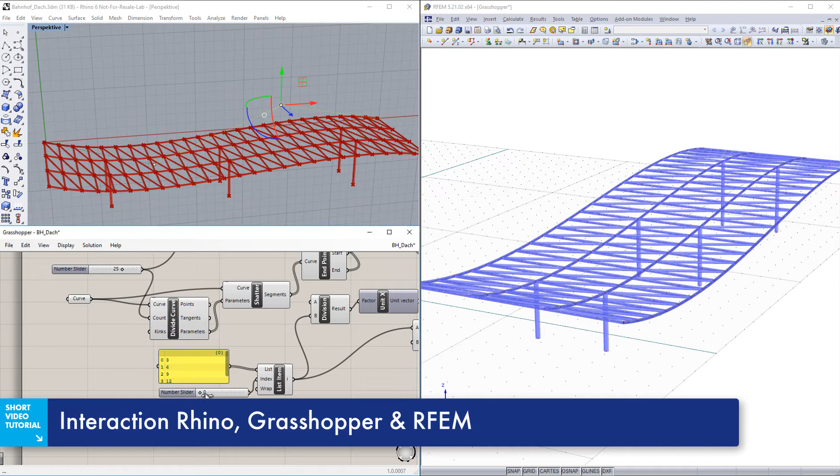Using the Rhino plugin Grasshopper, you can parameterize models as required. With the RFEM interface, you can export these models live to RFEM. Basic features will be explained in this video.

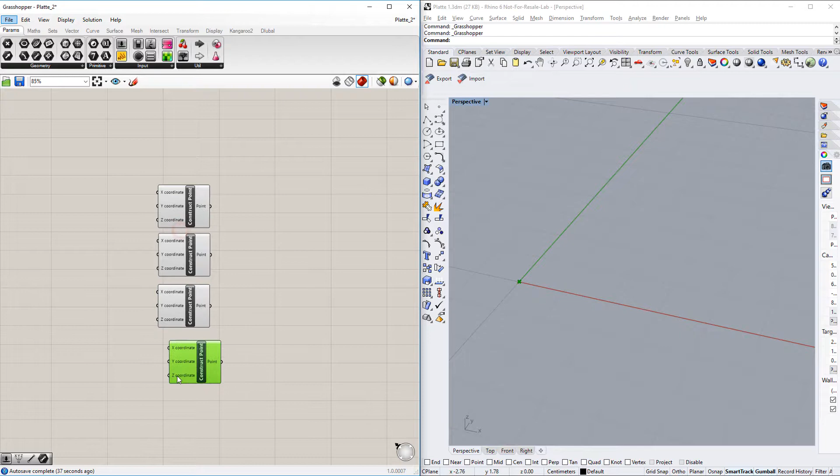First, create a point with the construct point command and copy it 3 times with Ctrl+C, Ctrl+V. Specify the point coordinates X and Y with sliders, so that they can be easily adjusted later with the slider. Connect the sliders to the point components, and assign the coordinates to the nodes.

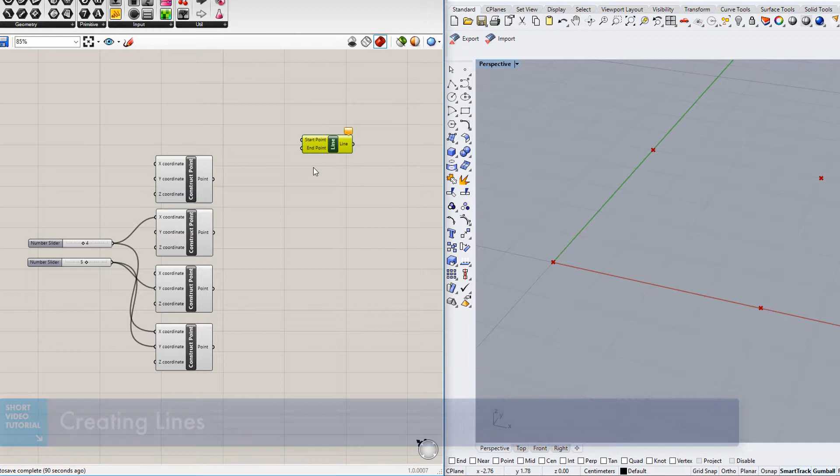In the window on the right, all elements are graphically displayed in Rhino. Now insert a line component, and create 3 more lines using copy and paste. Start and end nodes are then assigned to the lines. Simply also connect the individual components with each other.

To create members for RFEM, insert the Dlubal component member. You can find it in the Dlubal tab, which will be released with the interface in Grasshopper. Connect the line components to the member component and define the member geometry.

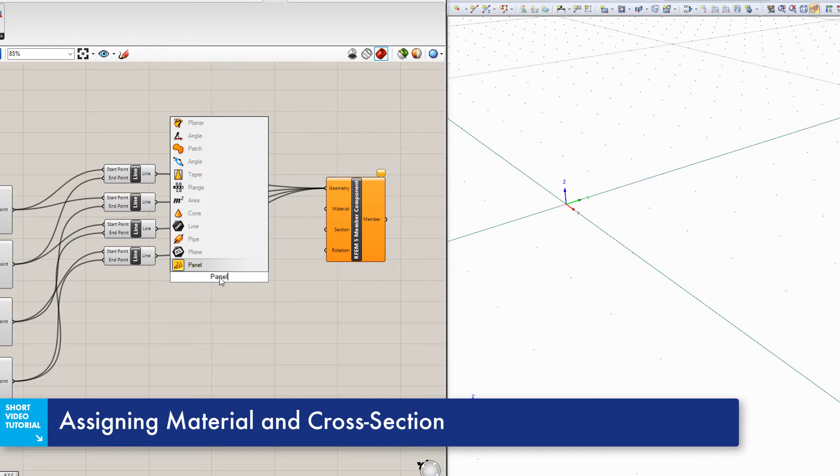Afterwards, define material and cross-section using the panel component. Make sure that you use the RFEM terminology. This information is then linked to the member component.

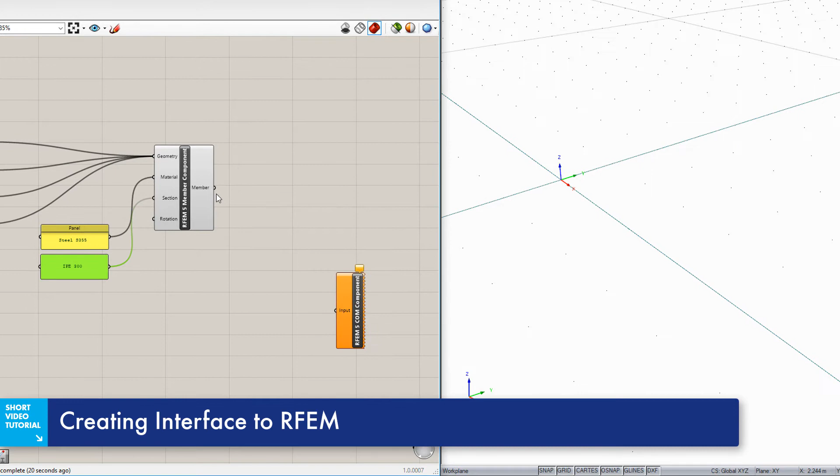To transfer this model data to RFEM, you have to insert the Dlubal component COM to Grasshopper. After connecting with the member component, all members are automatically transferred to the open RFEM file. By moving the sliders in Grasshopper, you can see how the interface works.

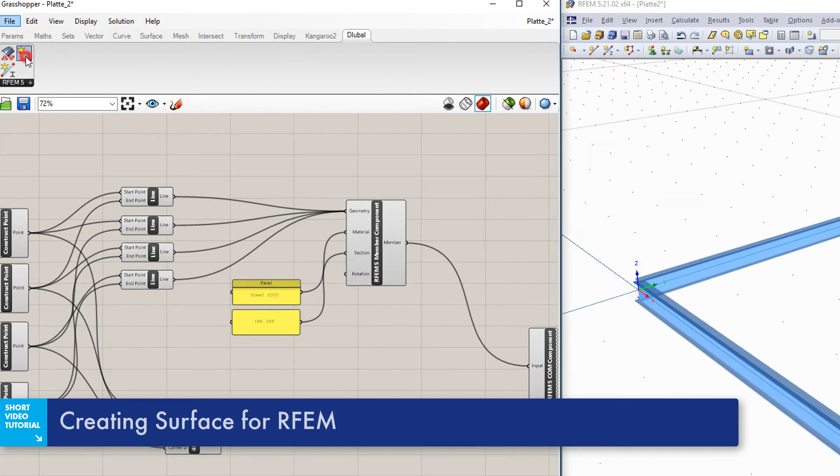Creating surfaces works on the same principle. Insert a surface component into Grasshopper, and connect the 4 corner points with it. With the Dlubal component for surfaces, you can merge this geometry now with all the information required for RFEM.

Like the member properties, the material and surface stiffness can be defined using the panel. Pay attention to use the correct RFEM terminology. Only then it is possible to export the elements correctly to RFEM.

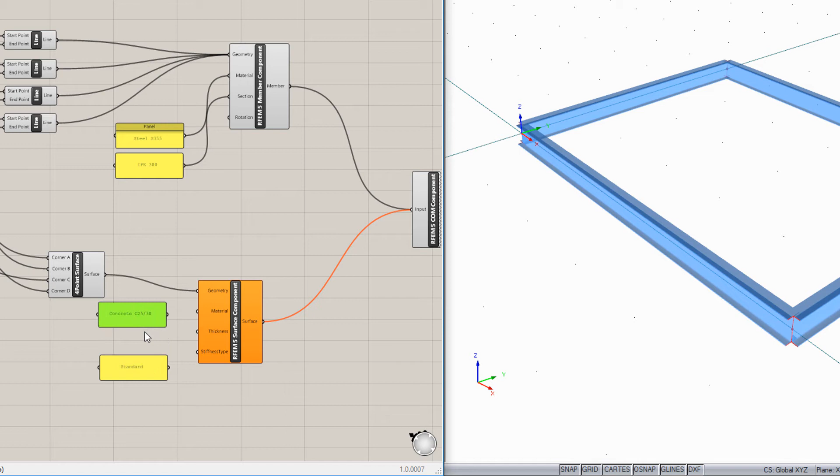In this example, the surface thickness should be controlled with a slider. They can be individually adjusted in Grasshopper. After connecting the properties with the surface component, the surface is exported to RFEM. All changes to the parameters in Grasshopper now have a direct impact on the RFEM model.

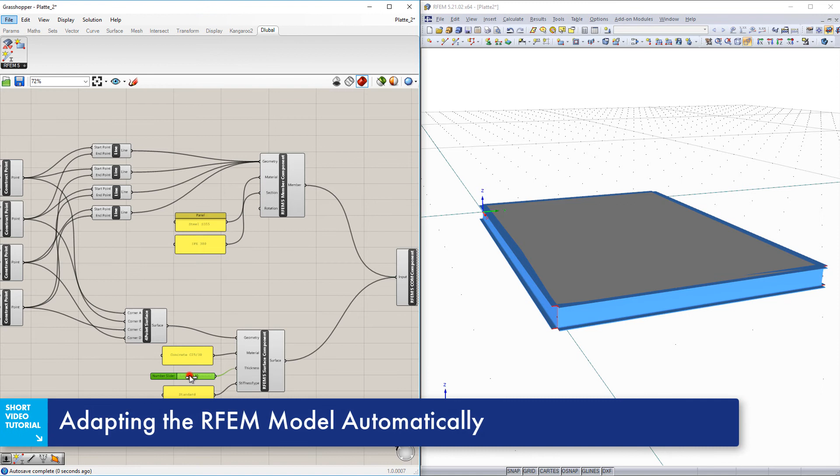Utilizing the Rhino software and the Grasshopper plugin, you can parameterize structures as required with a clearly arranged visual programming interface. This makes the product package especially interesting for architects and engineers.